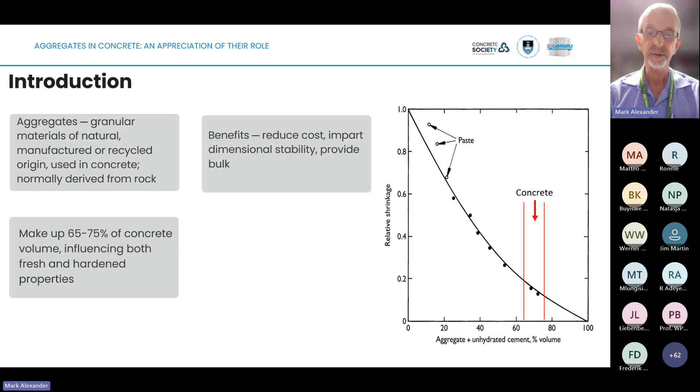That's where the concrete fits in. For example, an ordinary pure cement paste fits in right up at the top. You can immediately see that the addition of aggregates hugely brings down, in this case, the relative shrinkage. In other words, it produces a material that is an engineering material. Cement paste is not an engineering material, except maybe as grouts, but it's not going to work for structural purposes. However, aggregates make cement paste into an engineering material by bringing down the shrinkage, hence producing dimensional stability and improving many other properties. So that's important to understand.

Here are some nice pictures. On the left, we have a typical hard rock quarry, which is well-managed - you can see the benching, the drainage of water, the roads and so on. On the right, you can see a typical set of stockpiles with the cement silos in the background, and some mountains as well. This was a picture I got from George Evans on the Berg River Dam down in the Franschhoek area, about 20 years ago - a good picture of stockpiles and how well they're managed.

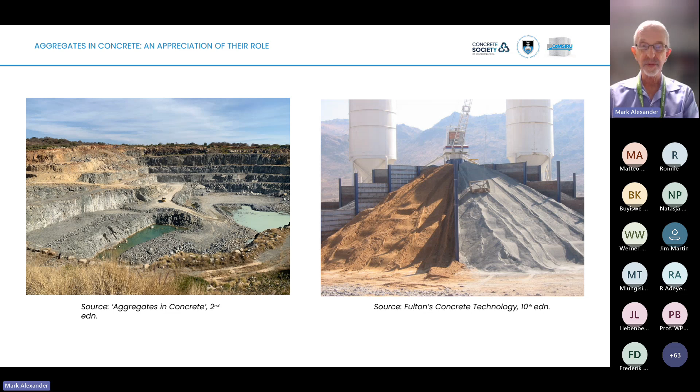All right, let's get going here. Now let's talk about classification. There are different ways of classifying aggregates. The first way is based on their size.

We have fine aggregates, which are generally classified as anything that passes the 4.75 sieve and is generally retained on the 75 micron sieve. Here you can see the South African standard for fine aggregates, SABS or SANS 1083. The immediate thing to notice is that there are only 2 requirements, maybe 3.

So you say to yourself, my word, can we do anything? And actually, in many cases, you can, because it's remarkable how you can make concrete out of a vast range of different aggregate sizes. In South Africa, we've tended to take the view that we're not going to over-restrict things, because we have to work with natural aggregates in sometimes very remote places. If we were too prescriptive, we might knock a lot of aggregates out of the game, and that may have adverse consequences.

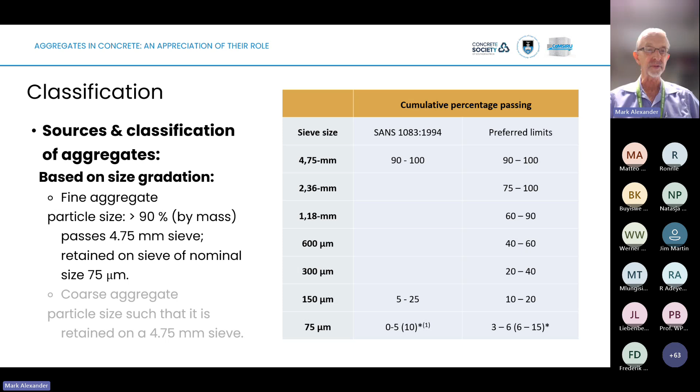We then get coarse aggregates. These are particles larger than the 4.75, and I know we're changing to 5mm sieves and so on - I'm still working with some old sizes here. Interestingly, it's down to the 19mm that really fits that definition. If you start getting 13, 9, and 6 aggregates, some material can fall below the 4.75 because these are the smaller sizes. But in general, that's the definition of a coarse aggregate.

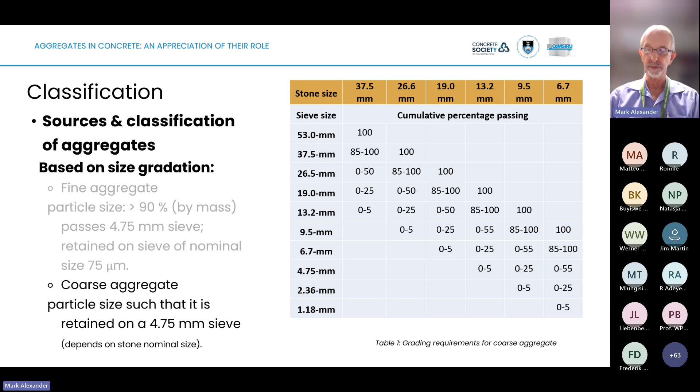If we look at the other way of classifying, based on source: the first, by far the majority, is natural aggregates that we get from crushed rock. In South Africa, almost all of our coarse aggregate is crushed rock - very little natural aggregate in the coarse range. The only thing it's been subjected to is some sort of mechanical processing, but it could be natural gravels in some cases.

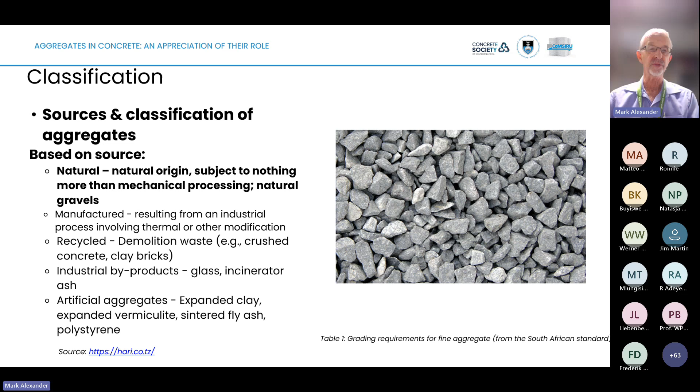Then the next lot would be manufactured aggregates. On the right here, we see an example of slag, a cooled slag, air-cooled slag with lots of vesicular voids in it from the escaping gas. That would be another kind.

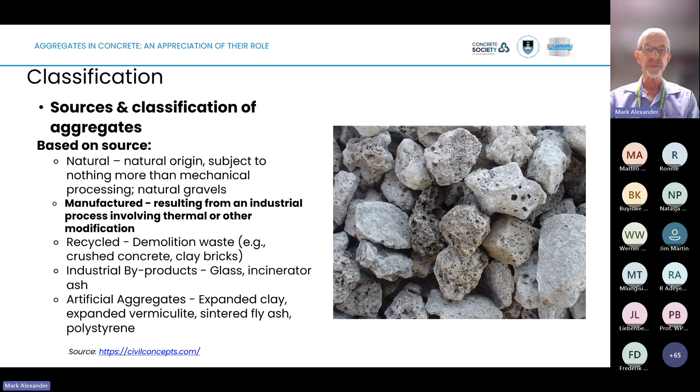We then can get recycled aggregates, and there's a lot more work being done on this at the moment, some very interesting work. The whole idea of circular construction comes in here. We have to start using materials, not throwing them away. So demolition waste, what can we do with it? We can make it into recycled aggregate.

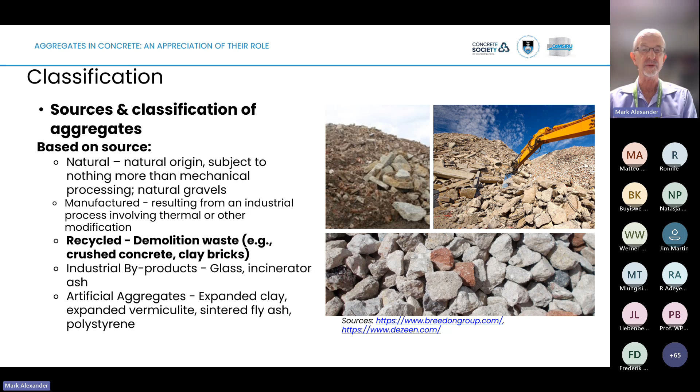We have industrial byproducts, such as, in this case, glass or incinerator ash. And lastly, artificial aggregates, and these are largely used for lightweight concrete. Not much of this in South Africa, but if needed, it can be obtained. So this is the kind of classification based on source.

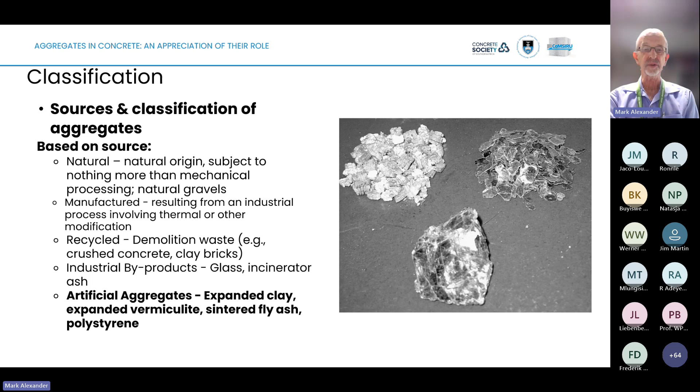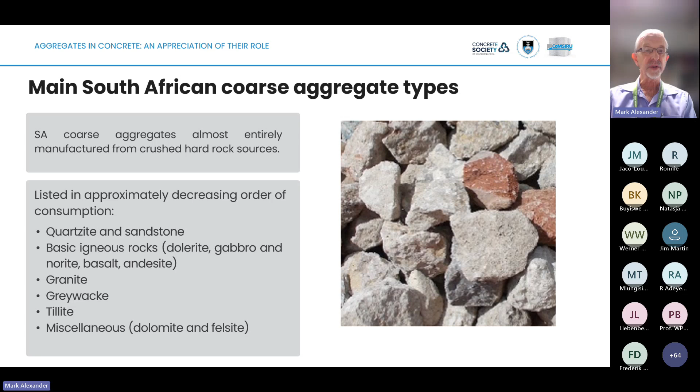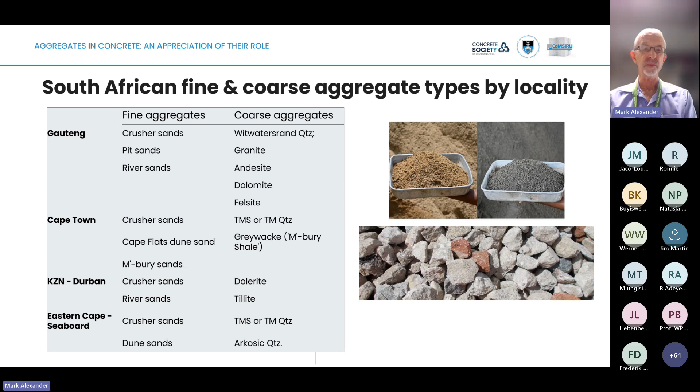For example, the dolomites are very much in demand if you're doing sewer work, or even for concretes of low deformation capacity, high elastic modulus, low creep, etc. We'll see more of that later.

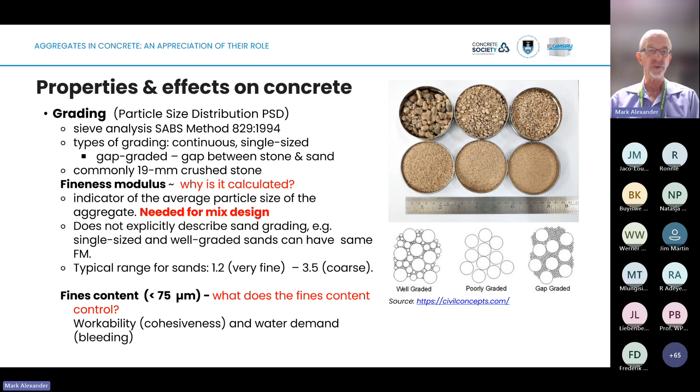The fines content is important largely for giving us cohesiveness or cohesion, and it controls quite a lot on the water demand, also on the bleeding aspect. So that's that one.

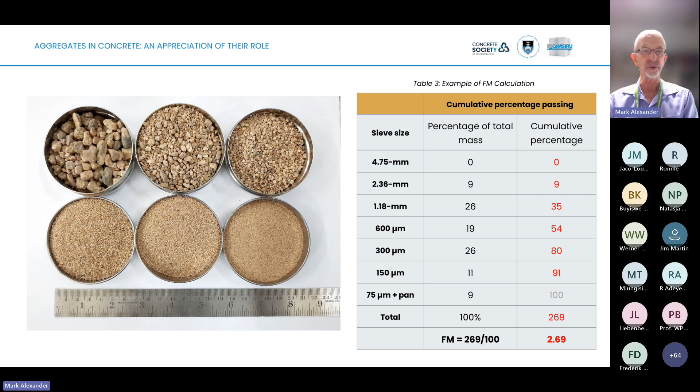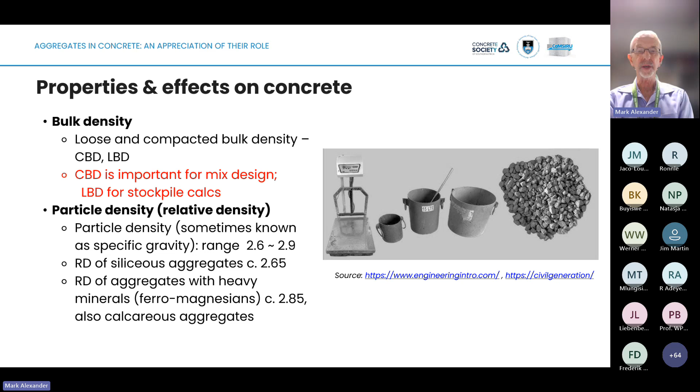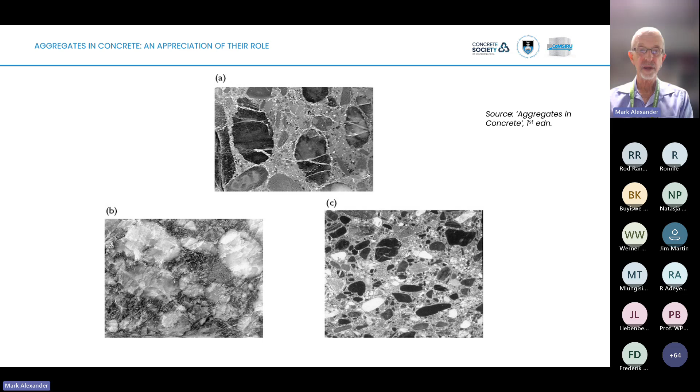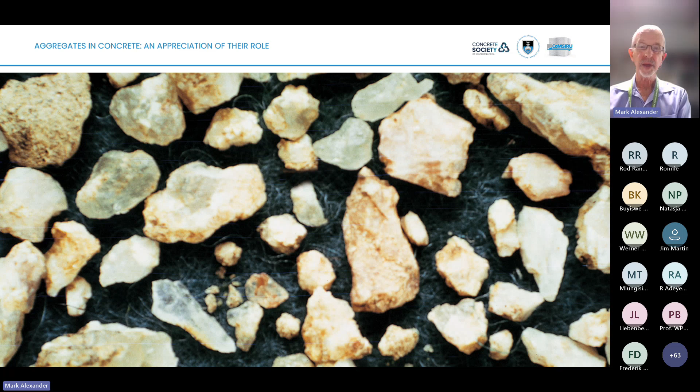Okay, this is a sand, and you can see it varies from really good particle shape to very angular and flaky, with variable surface roughness as you can see. If we look at the next one, this is a crushed Witwatersrand quartzite, really beautiful particle shape, generally clean, smooth surfaces, a little bit of rough here and there, but really a nice sand.

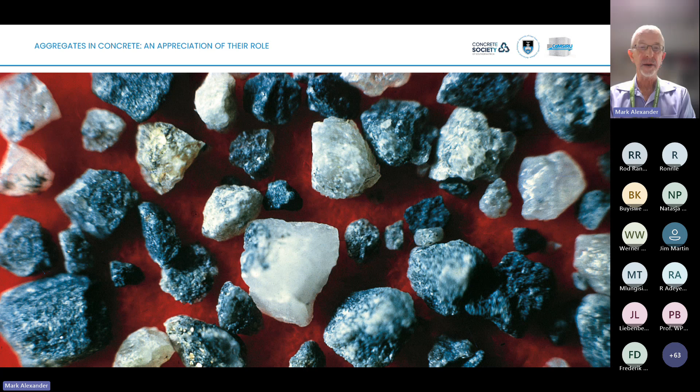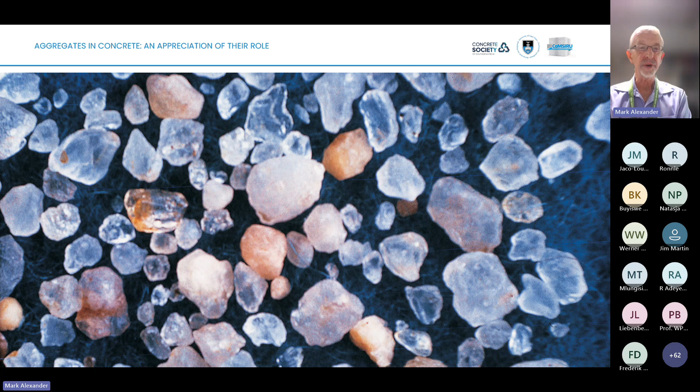The next one would be this one. Here again, this is almost what Consol uses to make glass with. It's almost pure quartz, very nice particle shape, very clean surfaces, smooth, and so on. Here is now another sample of crushed Wits quartzite, very, very poor particle shape, highly angular, flaky, all the kinds of stuff you don't want to see, and somewhat rough surface texture as well.

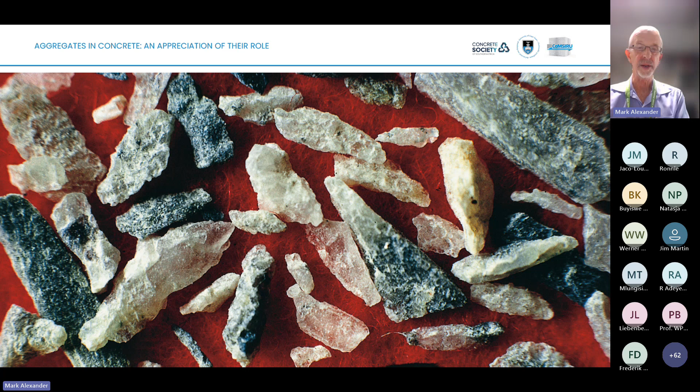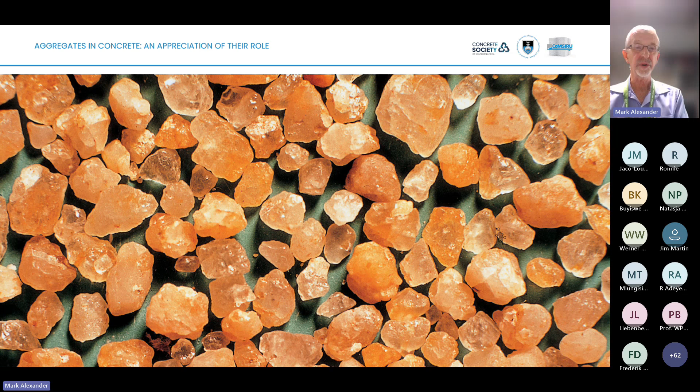If we look at this one, well, you can see what you can see there. You might think those were some cookies, actually, but they're not for eating. They are some kind of natural aggregate. And if we look at this one again, a very smooth, well-shaped aggregate, a nice stone there, but with quite a lot of rough surface texture, but very nice particle shape.

So you can see how this thing can vary. And lastly, this is again that picture of slag. Now, over that whole range of aggregates, the difference in water requirement, if those were used in concrete, would probably be about 50 liters per cubic meter. Now, take a water cement ratio of 0.5, that would translate into about 100 kilograms of cement.

If we were to use the one with the lowest water demand versus the highest water demand, that would cost us about 100 kilograms of cement. You can do the maths, you can see what effect that would have on cost. So as Steve Croswell used to say, the combination of cheapest ingredients is not necessarily the cheapest combination of ingredients. You can think about that while we go on.

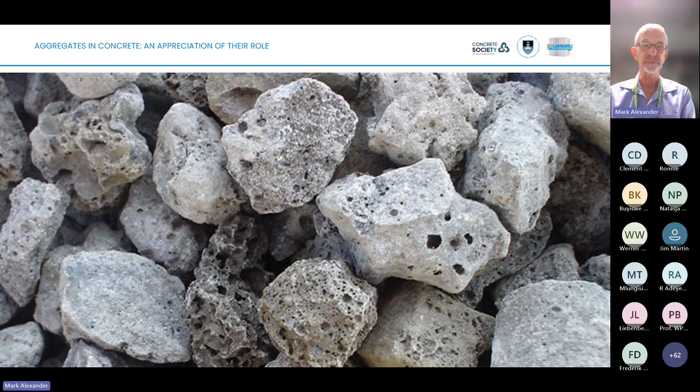Okay, now let's talk a little bit about the interfacial transition zone. This is the zone between the cement paste illustrated to the right, which is composed of calcium silicate hydrate, some portlandite or CH, and then the ettringite, and the aggregate, which is to the left. It's this narrow zone which really governs the cement paste aggregate bond.

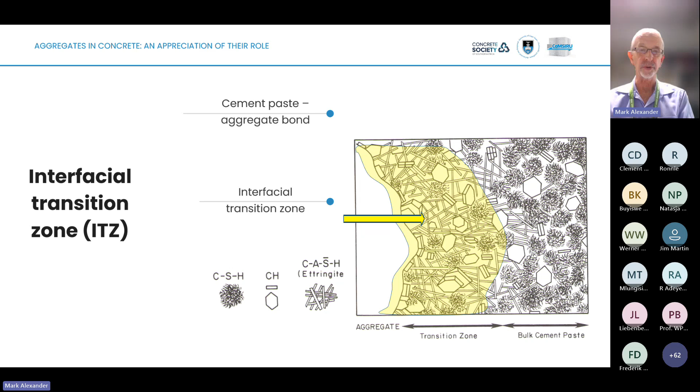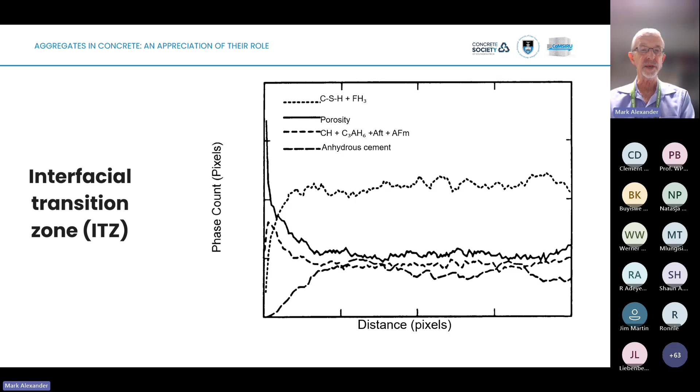So this zone can be very porous, of low strength, and low stiffness. The consequence is that it strongly influences, first of all, the cement paste aggregate bond, and secondly, maybe even more importantly, the stiffness of the whole system. Stiffer ITZs allow greater mobilization of the aggregate properties, and we'll see that just now.

So the ITZ, we've realized in the last, say, two decades, is really a very, very critical part of concrete. And we've also learned how to control this zone, if we know what we're doing.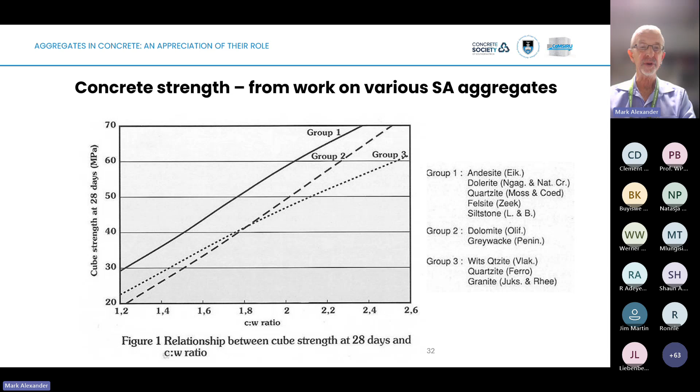And this is something which the aggregate people understand, and they make good use of it when they do their marketing. Of course, you have to have these aggregates available - it doesn't mean that they're all available in every area.

When it comes to aggregate strength, obviously we are working with the material in its granular form. We can take rock samples or rock cores and test the unconfined compressive strength, but usually we test this indirectly through either the aggregate crushing value or the 10% fines aggregate crushing test. Essentially, you take a sample of graded aggregate, a certain grading and mass, put it into the steel cylinder, and then crush it under a loading machine, measuring either the percentage fines created or the load to give you a 10% fines value.

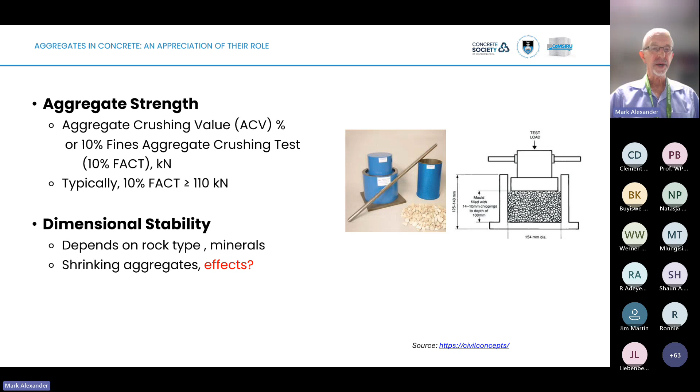So that's the 10% FACT test, and usually we're looking for FACT values around about 110 and higher for a good competent aggregate. Dimensional stability of aggregates is important because this affects shrinkage and creep, and we'll see that a bit of time as well just now.

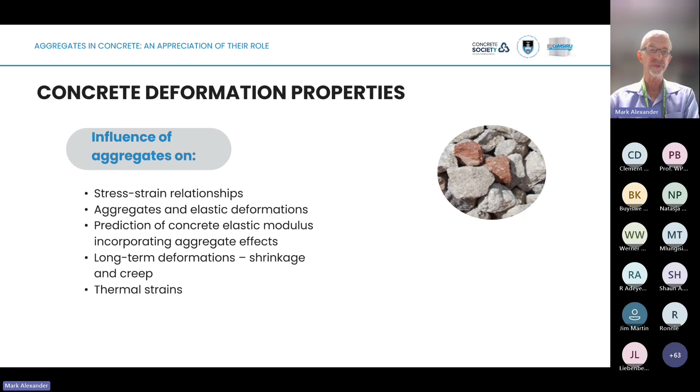So let's talk about concrete deformation properties. In many ways, the aggregates affect these properties even more than strength. These are stress-strain relationships, elastic modulus, shrinkage and creep, and thermal strains. And again, this was work from some time ago.

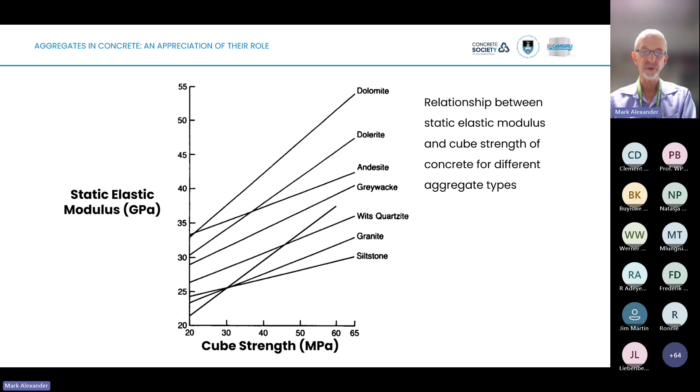This has a lot of importance when calculating long-term deflections. The difference between the short-term elastic modulus and the long-term elastic modulus could make a huge difference, and this needs to be appreciated. Not all aggregates will do this, but every aggregate has its own fingerprint and needs to be understood.

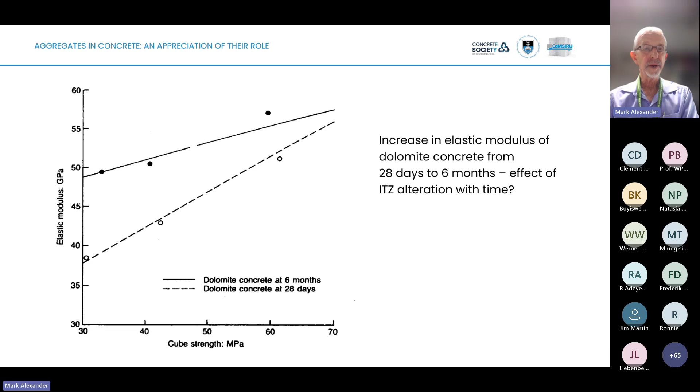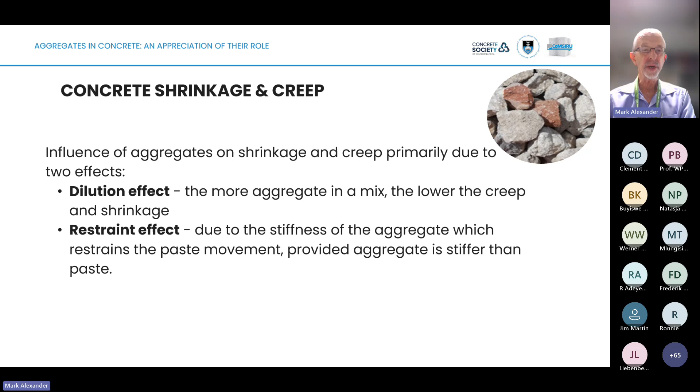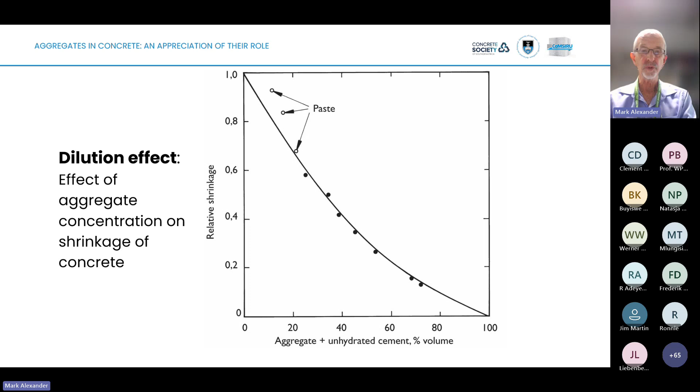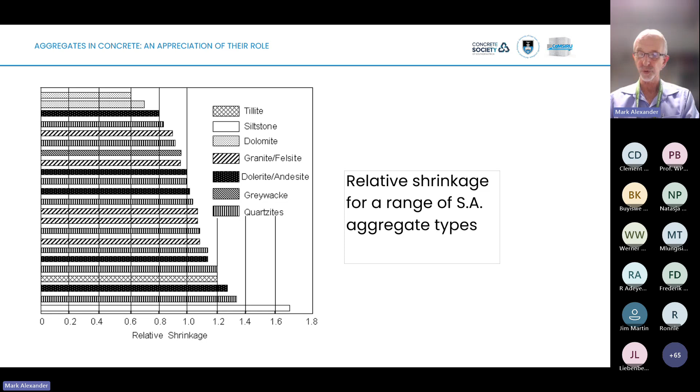Here again, the shrinkage could differ by a factor of 2 depending on the aggregate type. This is really critical when you're looking at deflection-sensitive structures. Here's the creep curve.

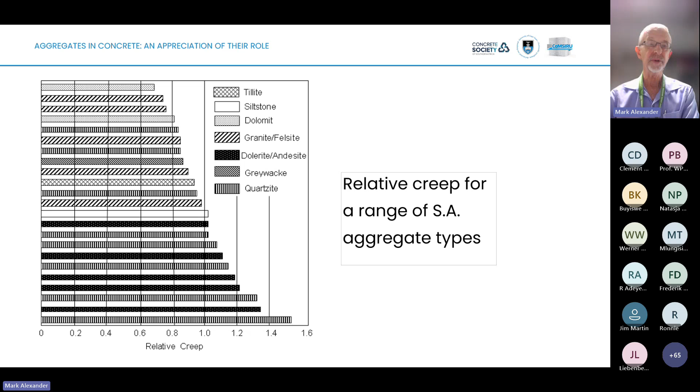Again, the dolomites show really very low creep up top here, which may or may not be a good thing - I'm not saying you always need low creep, you sometimes might need higher creep. Down the bottom here, not so much the siltstone, but the quartzites. The other important thing to notice is that the quartzites vary all over - they pop up all the way down this graph. So you can't generalize on geological type, maybe with the Transvaal dolomites, but other dolomites may not do the same thing. Again, every aggregate has its own fingerprint and its own particular properties.

This is, again, the restraint effect. If you plot total strain - elastic plus shrinkage plus creep - under sustained compressive stress of 5 megapascal versus the elastic modulus, there's a lot of scatter on this graph, but the general trend is there: higher concrete elastic modulus, lower total strains.

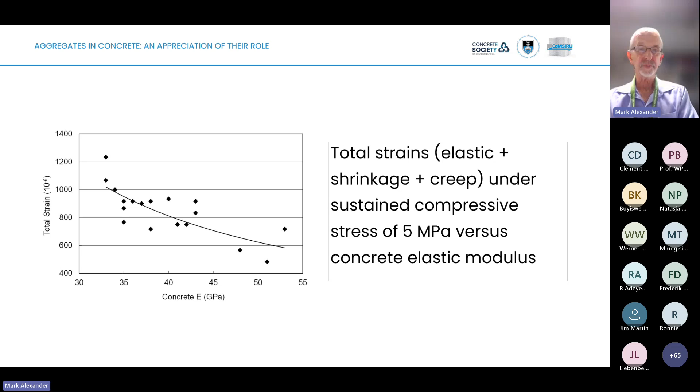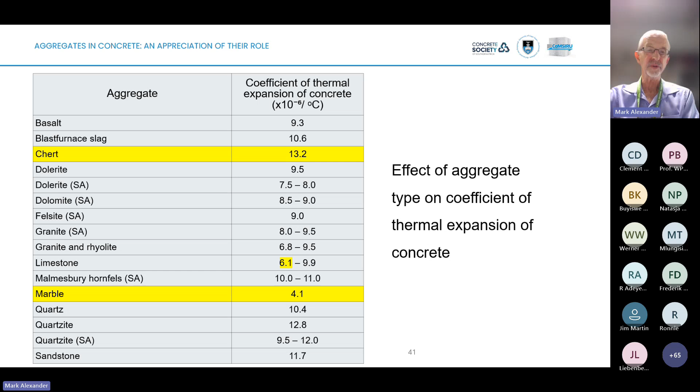Likewise, in the thermal effects - I'm not going to go through this in detail - you can see the cherts give quite high coefficients of thermal expansion in concrete, marble very low, and limestone somewhere in the middle. But most of our aggregates give concrete thermal expansion coefficients of around 10, which is what we want in many cases.

What about concrete durability? Very briefly, I'll bring this to a close now. Paste is not a durable material in effect, but when you put aggregates in concrete, you can produce a durable material because the aggregates are generally the most durable component of concrete. They are not susceptible to leaching or acid attack and so on.

On the right, you can see sometimes we get internal lack of durability due to aggregates - sometimes they can cause problems, mostly they don't. But here is an alkali-silica reaction diagram at the top right, very common in the Western Cape, where you can get quite severe deterioration with time.

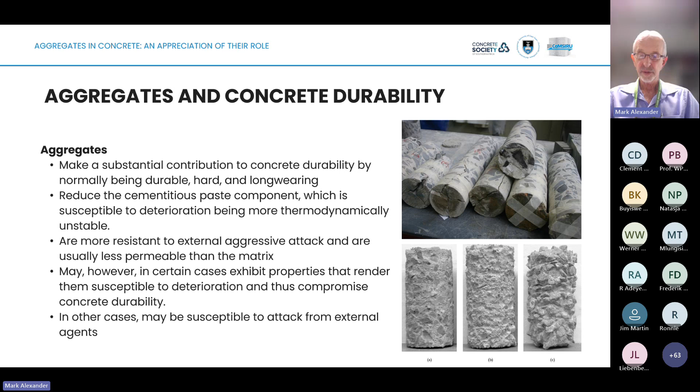And on the bottom is what happens when you get different kinds of aggregates in concrete attacked by acids. In this case, on the right is an aggregate that is acid susceptible, and on the left one that is not acid susceptible. You can see the difference in the overall effect on the concrete.

Here is a diagram, actually from Fulton, where I'll just mention that the most common ones we deal with in aggregates are alkali aggregate reaction, which will be the subject of the next talk next month, and acid attack, which particularly occurs in concrete sewers. There are also physical mechanisms - surface abrasion, freeze thaw, surface wetting and drying, and so on - won't go into that in detail.

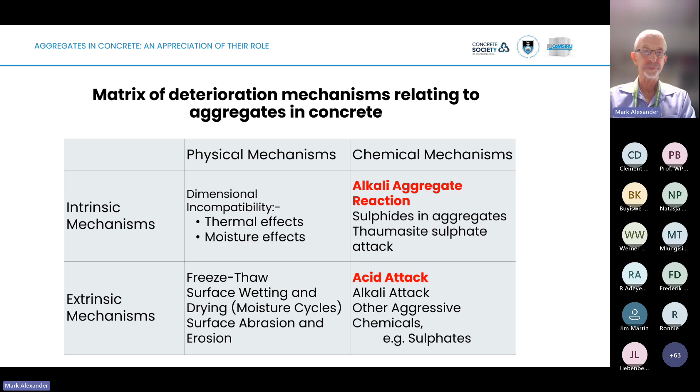Lastly, there is the question of aggregate standards, and I've stuck some down here for you. These are important because they tell us what we can do, although in many cases we may have to be willing to work outside of these standards, provided we have evidence that the aggregates we're working with will meet the performance requirements. So these standards at this stage are still prescriptive. They tell you what you need to have rather than what they need to do.

And there we need to slowly move towards more performance type standards. Our aggregate standard is still SANS 1083, which is still waiting finalization for the latest version. But there's the Indian standard, the ASTM, and the British standard as well, which is an EN standard. So they lay out the primary requirements and specify the standard tests. But the point I want to make is that sometimes we have to work outside of those limits just to get a concrete that might work in a very difficult situation.

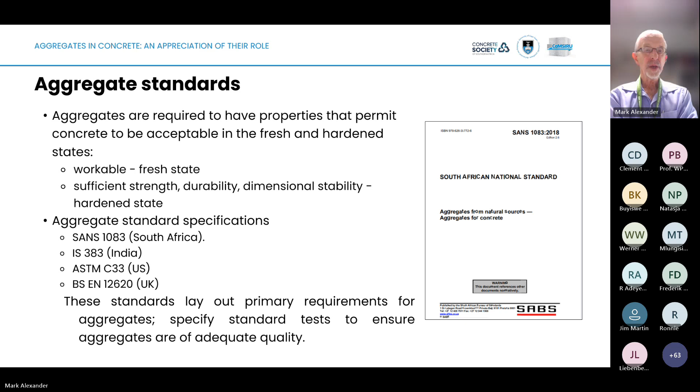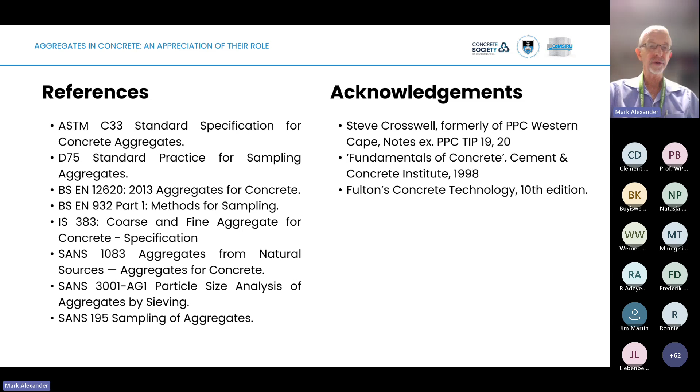And lastly, thank you for listening, and if there are questions, we can try and take them now. Thank you so much.

Thank you very much, Mark. I think we can all give him a thumbs up, react, or if you really want to do a thumbs down, but just give our appreciation, and hope, Mark, you can see that all on the screen. Yes, thank you, it looks quite something.